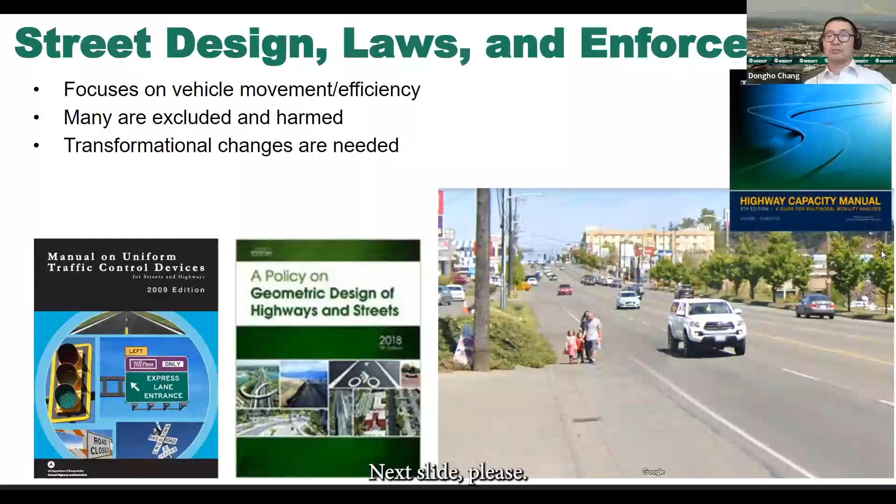Traffic fatalities are really staggering. Worldwide, approximately 1.3 million people die in car crashes, according to the World Health Organization. In the United States, 43,000 people were killed in 2021. We're not comparing very well to other developed nations, we are unfortunately on the high end of traffic crashes and people harmed. Roadway crashes are the leading cause of death for people under age 54 in the United States, and if you think about that number, it's pretty staggering.

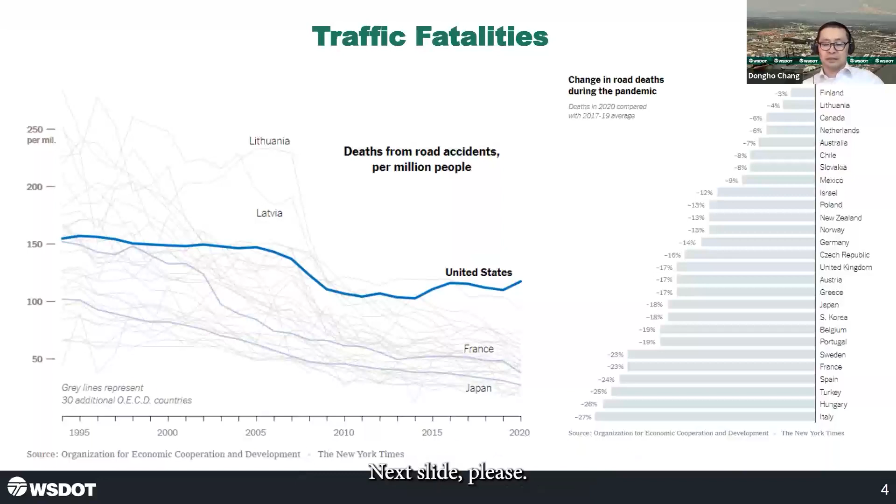In Washington State, we saw 745 people die in 2022. That's the highest number of traffic deaths we've seen since 1990.

This is in the backdrop of people traveling less due to COVID and telework. It highlights the fact that even with fewer people driving, we continue to see higher and higher numbers of people impacted by traffic crashes.

The cost of inaction is incredibly high. In Washington State, the annual cost of collisions and safety is $18 billion, which is more than our other costs of transportation network, state of good repair, and congestion combined.

Safety is highlighted by our Secretary Millar as a focus for Washington State DOT. We all need to recognize that the cost of inaction is costing society more than what congestion or other costs are.

We do have a chance to transform our streets and our community to reflect our societal values. This is the first time ever that U.S. Secretary Buttigieg and WSDOT are leading the way, adopting the safe systems approach. This is really exciting to have that leadership for the entire transportation system in our nation.

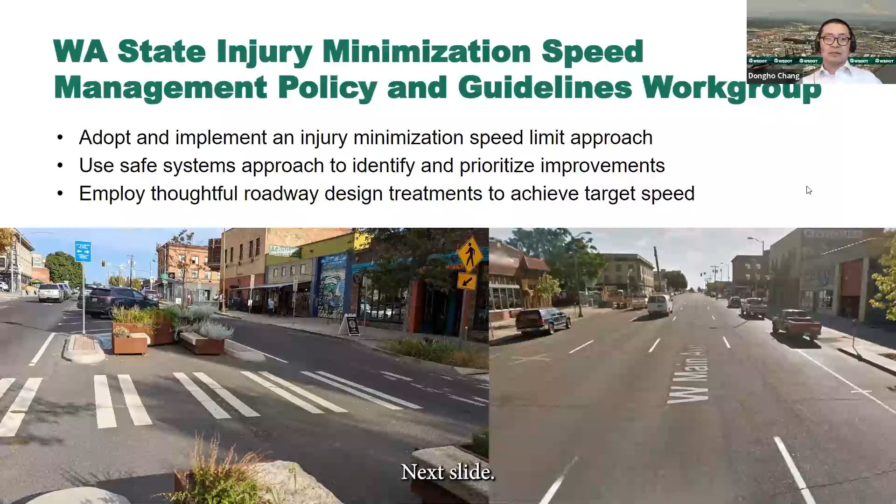Next slide. This is an example on Green Lake and Highway 99. I'm going to give you several examples of implementation. This is a location where a jogger was struck, and her vertebrae were separated due to the forceful impact of that collision. It's really geared towards a different environment coming into this very vibrant community.

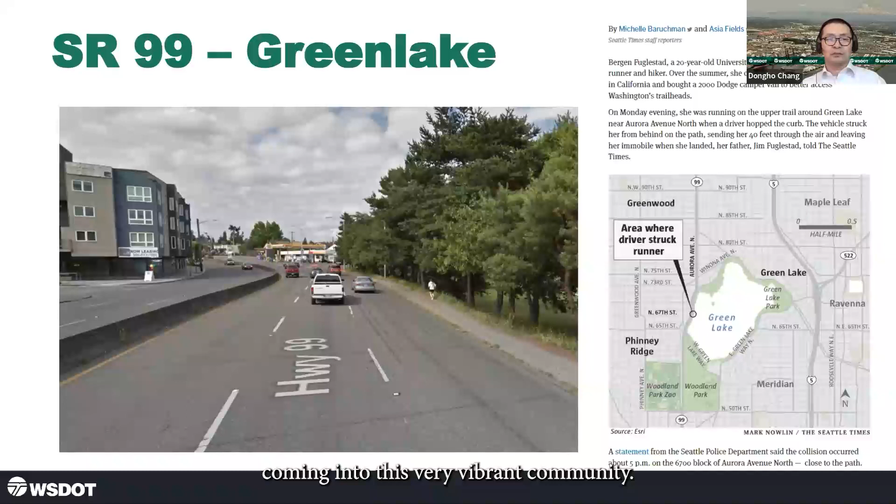Next slide. Working with the local agency, City of Seattle, one of the lanes was converted to a barrier-separated bike lane. It totally transformed that area for access. It's much more comfortable to walk and bike and enjoy the most popular park in Seattle.

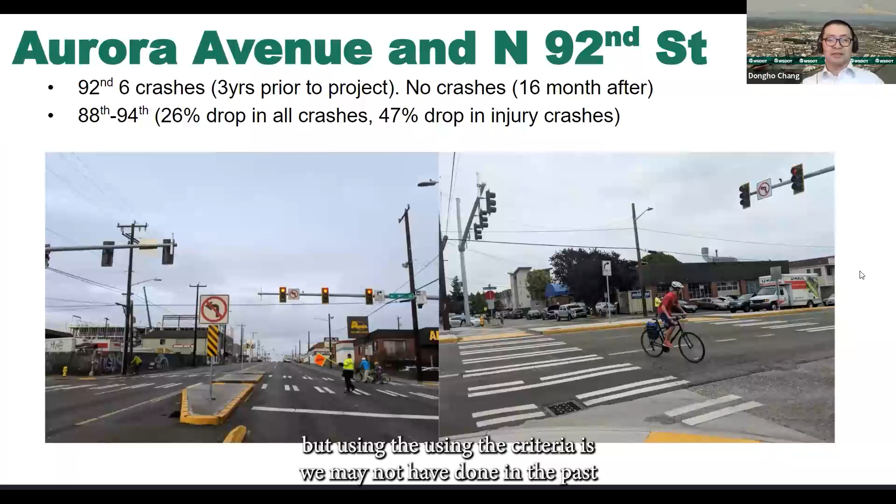Next slide. Another location just north of that Green Lake area, where a pedestrian crossing signal was put in prior to the school opening. This is something we know we need to do, but using the criteria we may not have done in the past. Before and after studies really show the safety benefits, where we reduced the crashes at this location.

From 6 crashes in the 3 years prior to the project to no crashes in the 16 months after, and a significant drop in injuries and crashes to the surrounding blocks—a 26% drop in all crashes and a 47% drop in injury crashes.

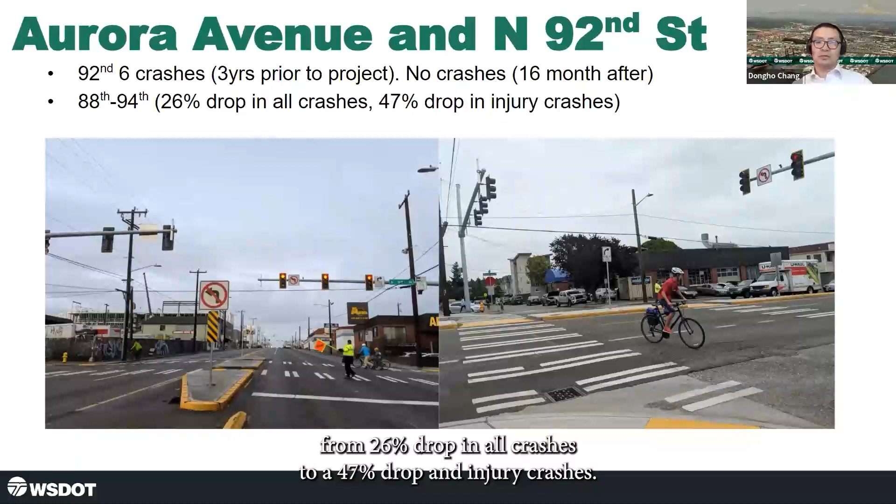So it's actually teeing up to an all-way stop condition, providing bicycle facilities, putting in crosswalks. It just enhances and provides that access to people accessing the park, and changes the whole character of that street itself. We have to do more of this type of thought process and treatment in all of our locations.

Next slide. This is a location with a similar situation, where there were no pedestrian facilities and transit access. This is the business route, West Main in Sunset Boulevard in Spokane. During a paving project, a space that was not utilized had lanes narrowed to create a separated pathway, and a crosswalk was put in to access the bus stop.

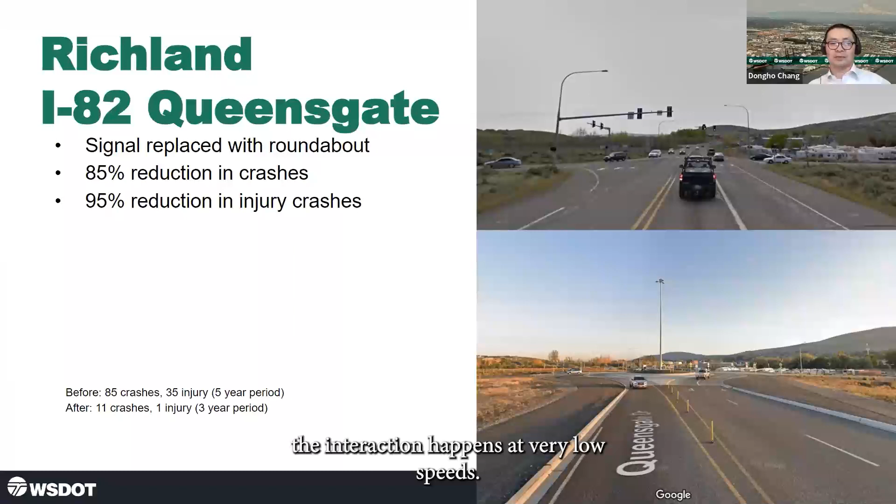The replacement of the signal with a roundabout actually increased the traffic volume through the area by 6,000 vehicles, so it now handles 35,000 vehicles per day. During the peak hour, 40% of that traffic is trucks—really the mode that needs to be handled for that port area.

With that context, there's a multi-use path crossing in that area, and within this implementation, we have seen no serious injuries as a consequence.

Again, just really being thoughtful about how we provide the right treatment. The tools that we utilize can have a profound impact on reducing the injury level. And that is my slide, Marisa.

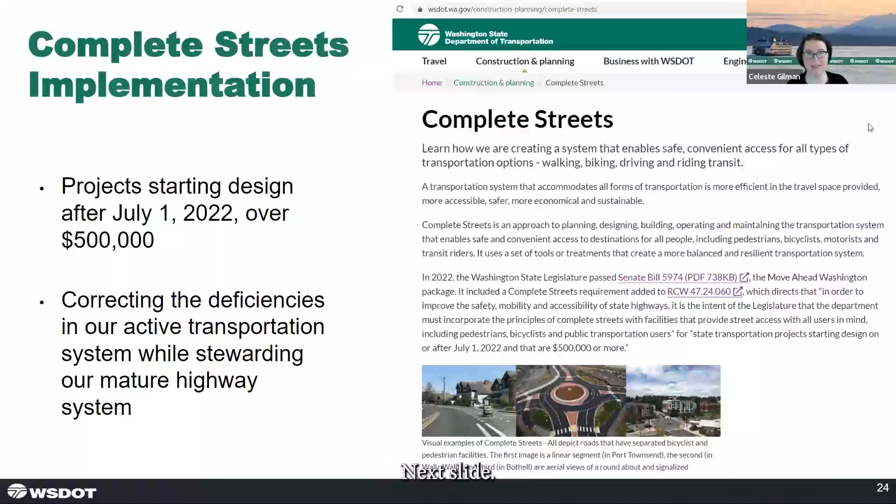Next slide. So how are we approaching that? There are hundreds of projects across the state. We want to focus on providing those facilities in locations where there's higher potential for making trips within a reasonable walking or biking distance. So we start with that entire universe of all projects over $500,000, and we have a screening process where we look: are they in an incorporated city, or are they in another population center - not an incorporated city, but has that look and feel?

A census designated place has that dynamic, that development pattern that we can anticipate may generate trips, and where we as WSDOT have identified active transportation gaps, or our local partners have identified those gaps, or where projects touch overburdened communities, recognizing they may have been challenged to do the planning work to identify those gaps. So far, we have screened over 600 projects statewide with design dates starting from that commencement date in 2022 out through 2028. This is multiple years worth of work ahead of us, and Complete Streets applies to about 40% of those projects, so hundreds of projects and hundreds of communities with improvements coming.

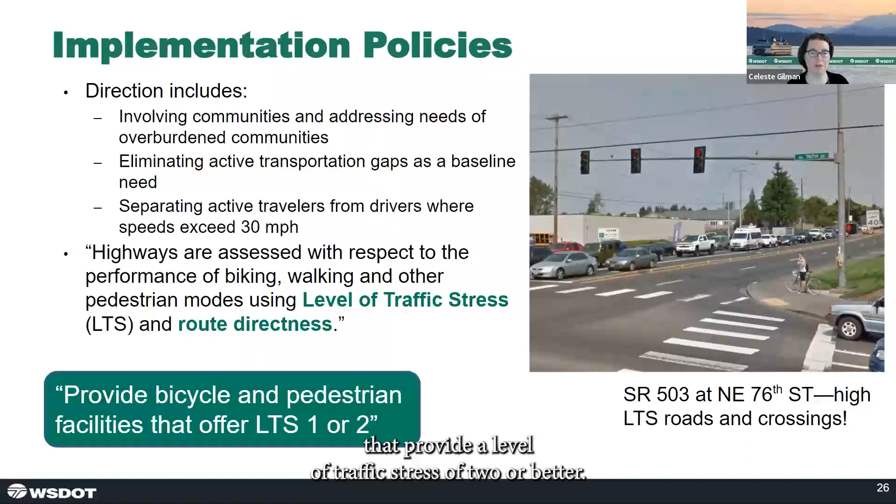And in keeping with that safe system approach Dongho was talking about, making sure that where speeds are in excess of 30 miles per hour, we're providing separation from drivers. We have a goal of providing facilities for walking and biking that provide a level of traffic stress of 2 or better.

Next slide. This slide gives a snapshot indication of the different levels of traffic stress. This is the metric that has gained a lot of traction nationally, and that we have adopted as part of our statewide active transportation plan. If you are not familiar with our active transportation plan, adopted in 2020, it is multiple award winning and has really laid the foundation for us in now implementing the Complete Streets requirement.

And that level of traffic stress 2 or better is both about providing facilities in keeping with that safe systems approach, reducing crash exposure and reducing speeds and the associated kinetic energy. It's also about mobility, because you can move a lot more people in a given amount of space if they're bicycling or walking than if they're driving in a car. Cars are the most wasteful of space option for moving people. So if we can provide facilities that really invite people to walk and bicycle in a space, we can also move more people in that space.

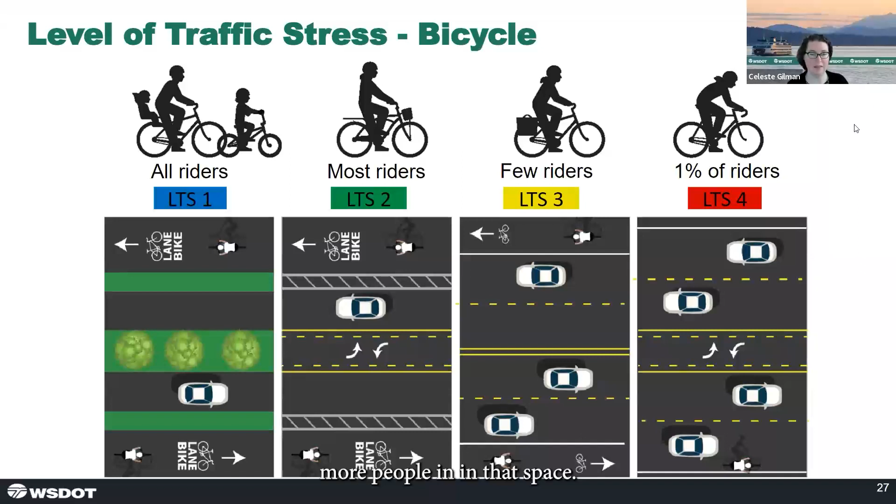Next slide. So this is the slide for the pedestrian level of traffic stress, and again those different levels and providing facilities that are going to be welcoming for most users.

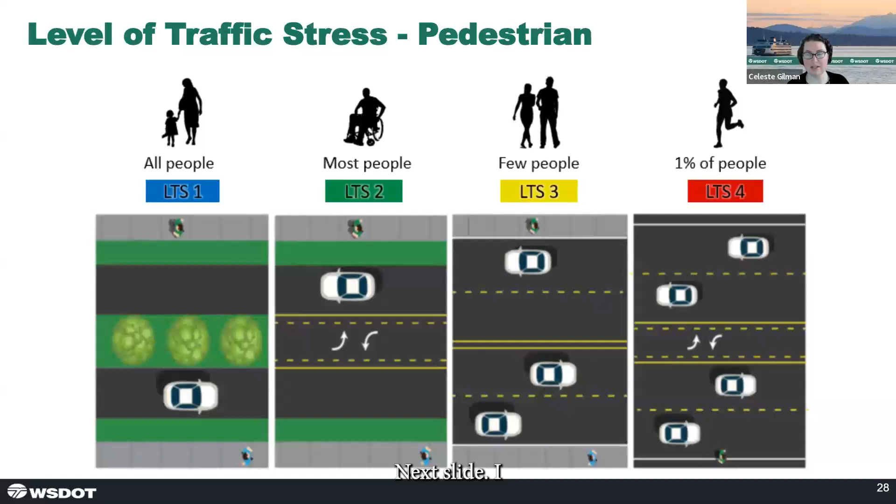Another key piece here, on the same themes as Dongho was talking about in the examples he gave, we're putting emphasis on looking at the space that we already have and using it differently. In many cases, we have wide lanes or excess vehicle capacity that we can consider, and this has not been the norm in many cases in the past, but that clear direction means we can consider those trade-offs, consider reducing vehicle level of service, consider that potential for mode shift. Really it's about creating balance across the whole system.

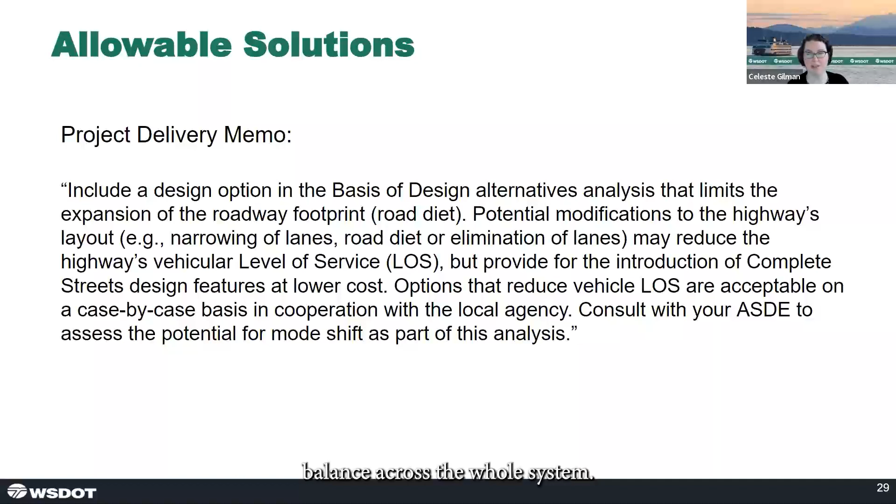And with that more balanced, equitable and resilient transportation system, we can have that potential to move more people, do so more safely with less greenhouse gas emissions, and really contribute to thriving communities. With that, next slide, and over to Zach.

Awesome, thank you, Celeste. I loved seeing the images of the level of traffic stress. I personally would love to see one be implemented a lot more, but I am okay with two as well, honestly. For our next panelist, we will have Zach, who is the Principal Multimodal Planner at Washington State Department of Transportation with the Management of Mobility Division. Go ahead, Zach. Thank you.

Thanks everyone for being here. Really happy to be here today to talk about complete streets in King and Snohomish counties.

I think we've talked a lot about the legislative intent behind the complete streets requirement. I wanted to give you a little peek under the hood to see how we're implementing it. As Celeste mentioned, we started this work back in July when the legislation issued the requirement on complete streets, and since then we've been working through a backlog of projects that apply from that July 1st start date.

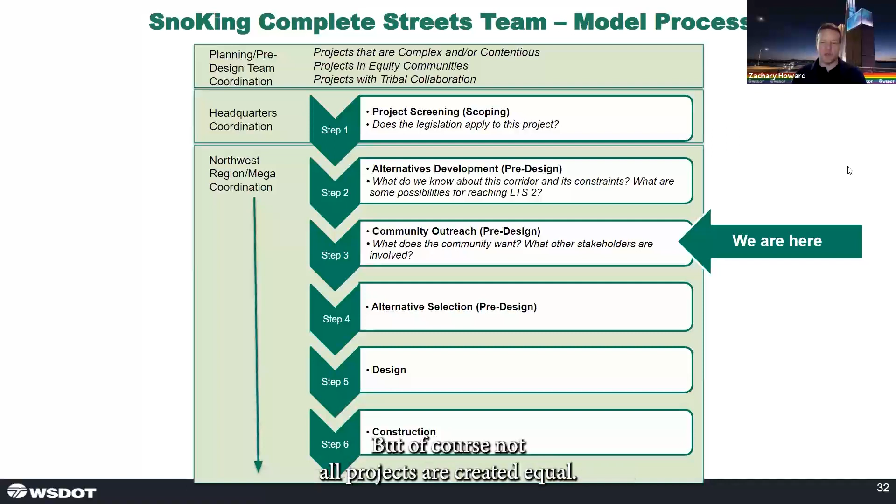A lot more work to come, but of course not all projects are created equal. The way we prioritized getting through all those project screenings and complete streets analyses was by trying to front-load our work with what we thought were simpler projects.

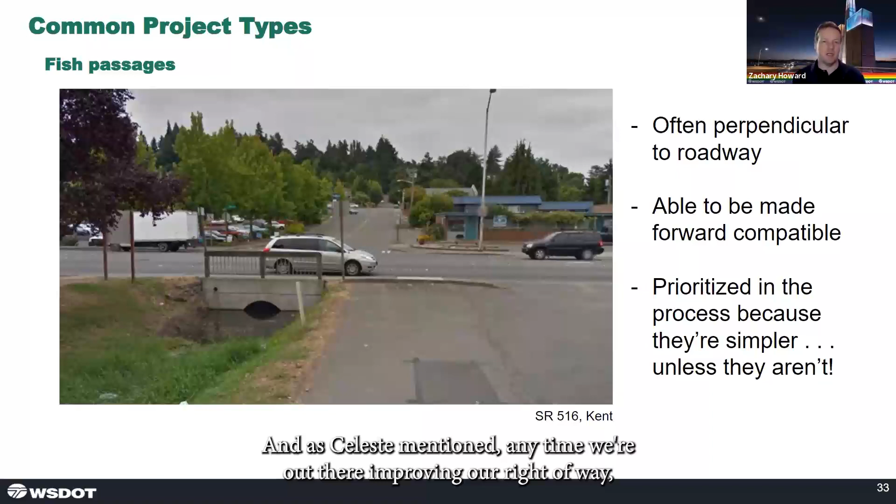WSDOT, like all state agencies, is responsible for any of the stream beds and culverts that travel under their right of way as part of the fish passage program in our state. We had about 1,500 of these culverts and stream beds last year that were found to block upstream fish habitats, and it's WSDOT's responsibility to correct that through capital projects. As Celeste mentioned, anytime we're out there improving our right-of-way, we need to be analyzing for the complete streets requirement.

So a lot of these are pretty simple. They're point-to-point, perpendicular to the roadway. Because of the size, cost, and location of the project, complete streets didn't apply to a lot of them. But in some cases they did. Now, I'm sure when you think of some of the images we saw earlier about complete streets with people biking and walking, and then you see something like this—this is SR 516 in Kent. This is what, 20 feet long? We're not going to build 20 feet of bike lanes or widen the sidewalk for just 20 feet and call that complete.

But at some point in the future, SR 516 is going to need repaving, or maybe some other kind of improvement, and WSDOT will be out there doing that work. Whatever replacement structure we put in here to correct for the fish passage obstruction needs to be what we're calling forward compatible. So what we don't want to have happen is for our designers to build something here that's great for fish, but then 5, 10, 15 years from now, when we come in and repave, we have to tear it out because it's too narrow or would otherwise conflict with reaching LTS2. So that's a bit tricky.

I know I said fish passage projects are a little bit simpler, but sometimes they're not. In fact, this one is a good example of that. You can tell just by looking behind that minivan that there's not another side to this culvert. In fact, the culvert goes under the roadway, turns left, and goes through that parking lot, connecting to a stream on the other side in some green space. So we have an opportunity here to look more closely and ask, is there an opportunity to improve the crossing here? How do we design for forward compatibility when we've got this kind of underground dogleg?

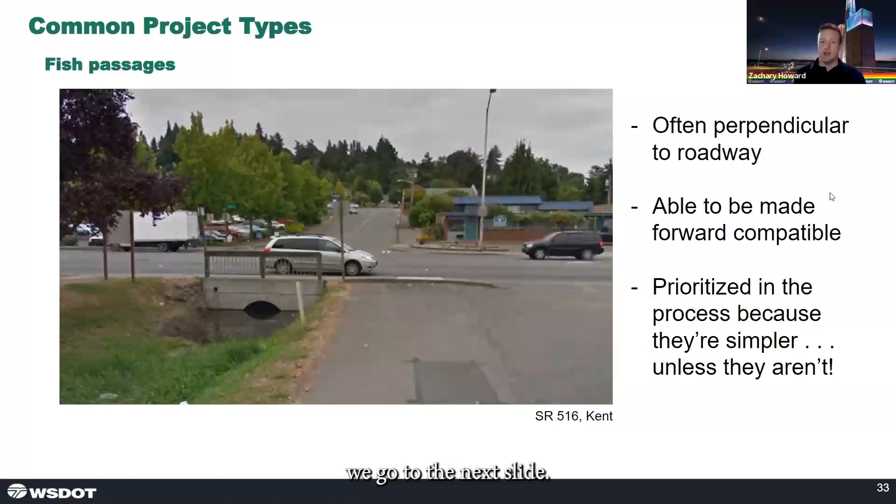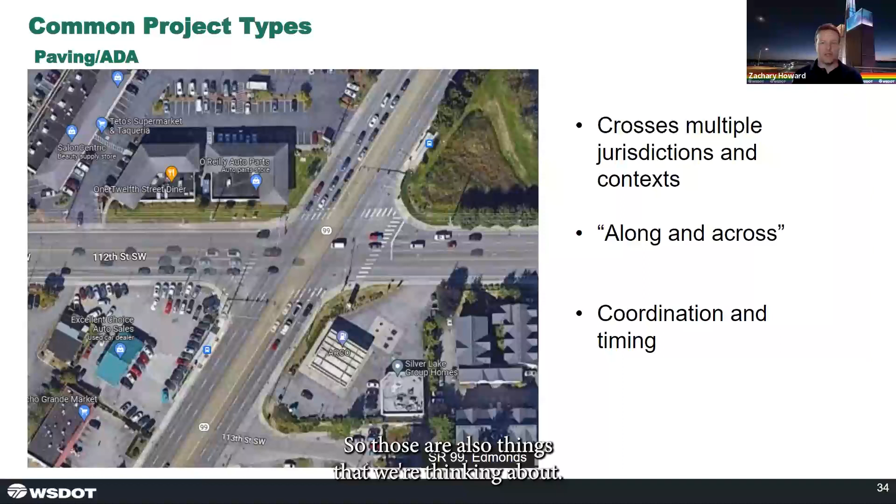And that puts pressure on WSDOT too. We have a very robust project delivery system at WSDOT, and we have to recognize that implementing some of these changes puts pressure on that. But at the same time, we're dedicated to planning with our partners, not planning for them. So we want to make sure we're not arriving in your town, or towns like it, and saying, this is what you're going to put in here—you're going to build bike lanes or sidewalks, like it or not.

We want to find what works for your community, and that takes time, discussion, and open-mindedness—that's what we're trying to bring to this. The other thing I want to point out that's new for WSDOT is that Complete Streets is really integrated into the design process, with planners integrated in a way that I think is an exciting step forward. We have a concurrence requirement for Complete Streets at different design milestones, and that's going to be an exciting change.

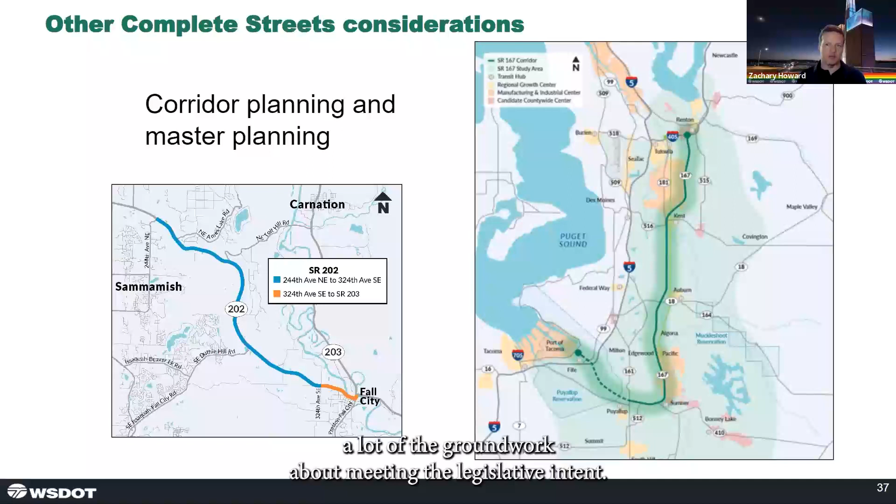We also conduct highway master planning processes, typically at the direction of the legislature. The picture on the right here is SR 167. That master planning process is underway, and it's being developed to be integral to Complete Streets, bringing some of those Complete Streets principles to bear on it, so that when the time comes to make improvements, we've already done a lot of the groundwork toward meeting the legislative intent.

Comprehensive planning updates are required by the State's Growth Management Act. The Management of Mobility Division at WSDOT has begun taking a more active role in reviewing comprehensive plan updates in the Central Puget Sound. Part of this review involves identifying future Complete Streets projects and suggesting Complete Streets policies if none are present, but really looking for those opportunities to collaborate.

Right now, for the City of Redmond, we don't have any projects on SR 202 or SR 520 where Complete Streets applies, but we will. We'll be needing to work with the City of Redmond and our partners to understand their planning needs and their visions for the future of transportation.

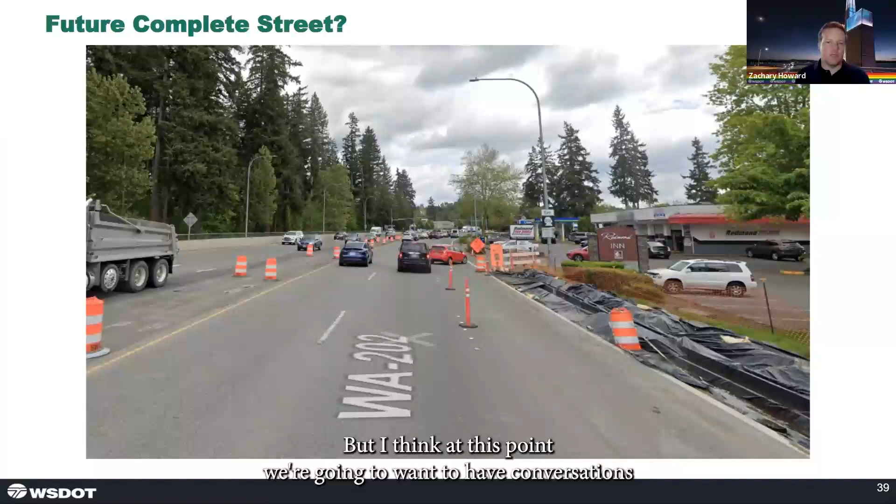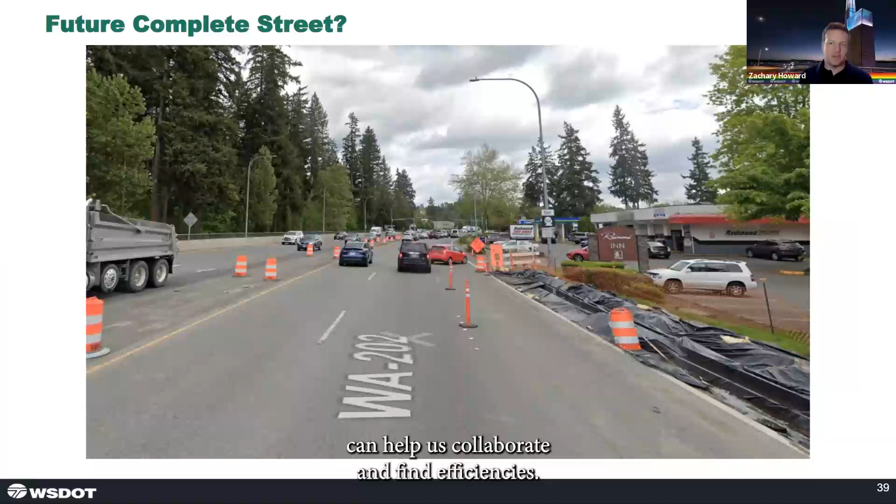But I think at this point, we're going to want to have conversations with our jurisdictional partners, especially in the City of Redmond. We're really looking forward to seeing how their Complete Streets ordinance can help us collaborate and find efficiencies. So I think that's my last slide—there's some information with a link to the page that Celeste shared earlier. Thank you very much.

Awesome, thank you Zach, I really enjoyed that presentation. I've actually crossed the road in that little SR 99 image you showed—I've used my bike there and crossed that intersection. I can guarantee that section is pretty scary to walk and bike around as well. So I'm super excited to see how Complete Streets is going to change a lot of intersections throughout Snohomish County, King County, and all throughout Washington in general. I'm excited to see how that's all going to move forward.

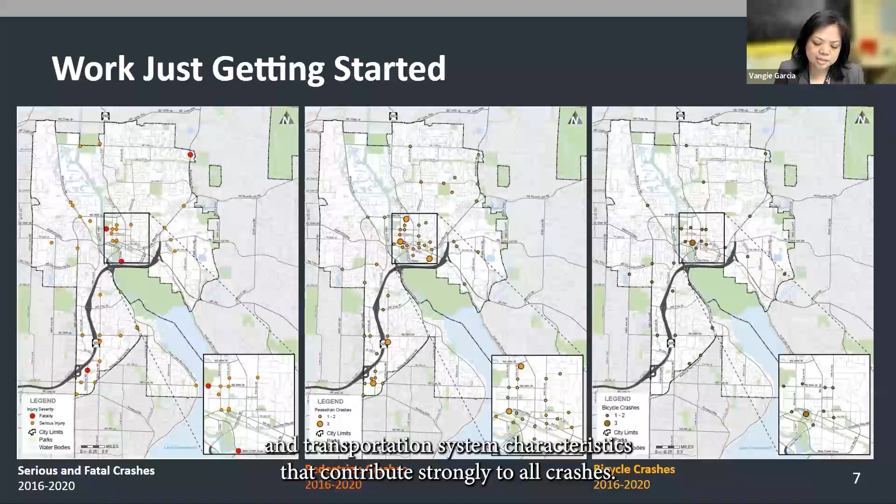The first step in the local road safety plan process is looking at the last 5 years of crash data to identify contributing factors, common circumstances, locations, and transportation system characteristics that contribute strongly to crashes in Redmond, especially those with severe outcomes.

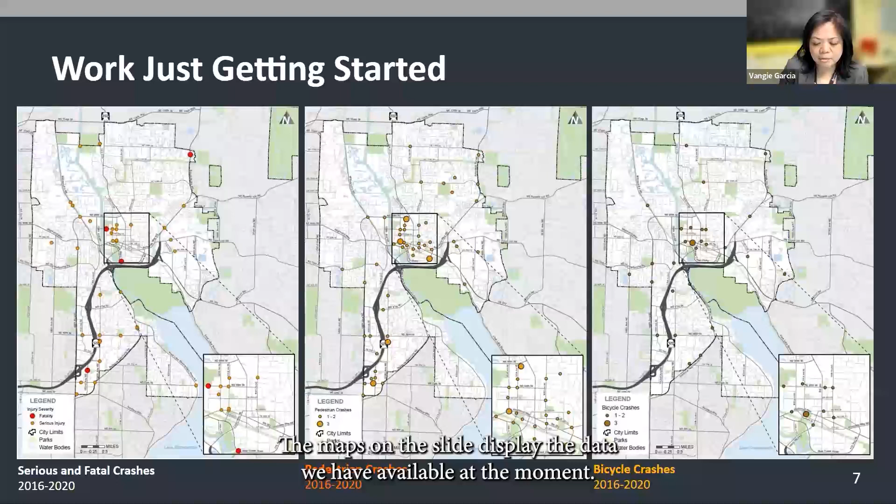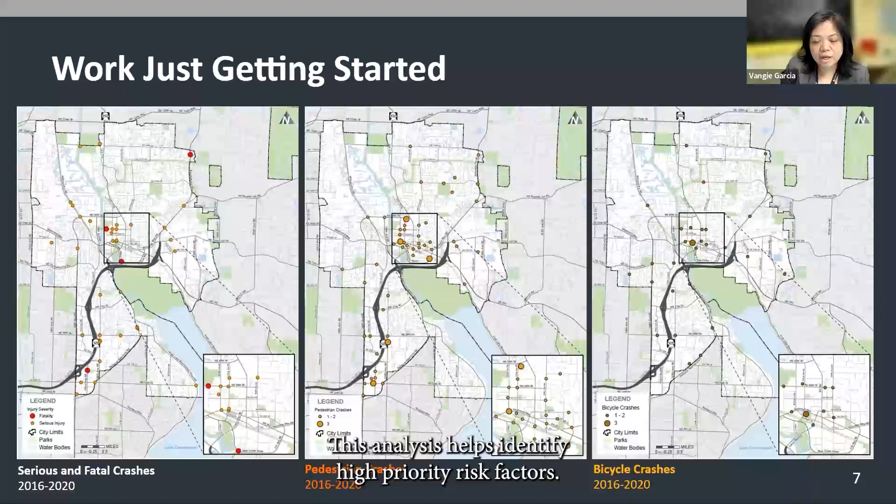The maps on this slide display the data we have available at the moment. These maps will be updated to include data up to 2022 later this year. This analysis helps identify high priority risk factors.

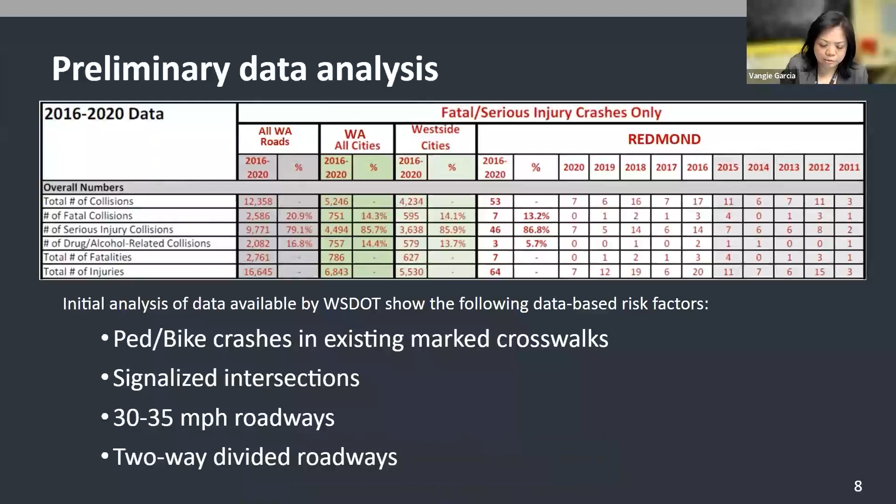This is a snapshot of a much larger spreadsheet of crash data. Looking closer at the data, in addition to posted speed limit and other environmental factors, provides a way to look at the data with a new lens. A preliminary look at data provided by WSDOT highlights the following risk factors: ped/bike crashes in marked crosswalks, signalized intersections, 30 to 35 mile per hour roadways, and two-way divided roadways.

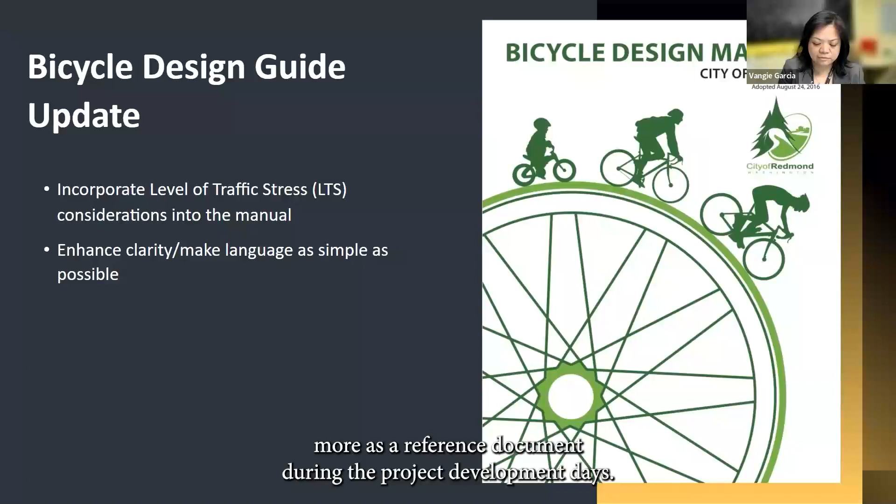The city will be updating the 2016 bicycle design manual to incorporate bicycle level of traffic stress and become more user-friendly, so it can be used more as a reference document during the project development phase.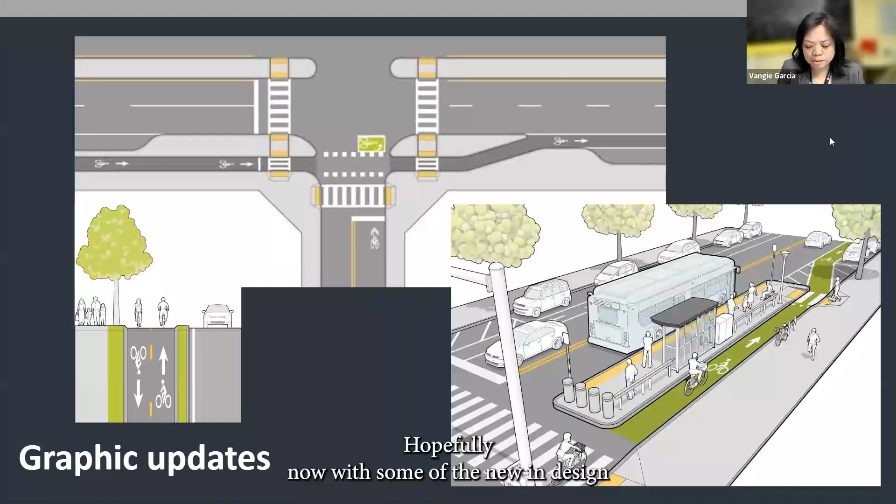The manual we have already has the city's current standards that include bicycle facilities that people have already been requesting. This update will focus on filling gaps in treatments or facility types the city is interested in implementing, and address situational challenges like transitions through busy intersections and matching new facilities to existing ones. Hopefully, with new projects in design and construction, the update will include local examples in the manual.

There is a lot of work ahead for the Transportation Master Plan that my team has envisioned. This is why we are working on pieces that can stand alone when finished. Ultimately, progress will be limited by resource capacity and engagement with the community.

But how can you all be involved? We can always send out the link to our Let's Connect page for the TMP, which is right now the best page to stay updated on everything going on. Since we're moving to the next phase of the Routes to Rails community engagement, I want to give a shout out to that. There's going to be future engagement for our local road safety action plan, probably in the summer. We also have an active pedestrian and bicycle advisory committee that meets monthly, so feel free to email me if you'd like to be on the mailing list and come to a meeting. That is the end of my slides.